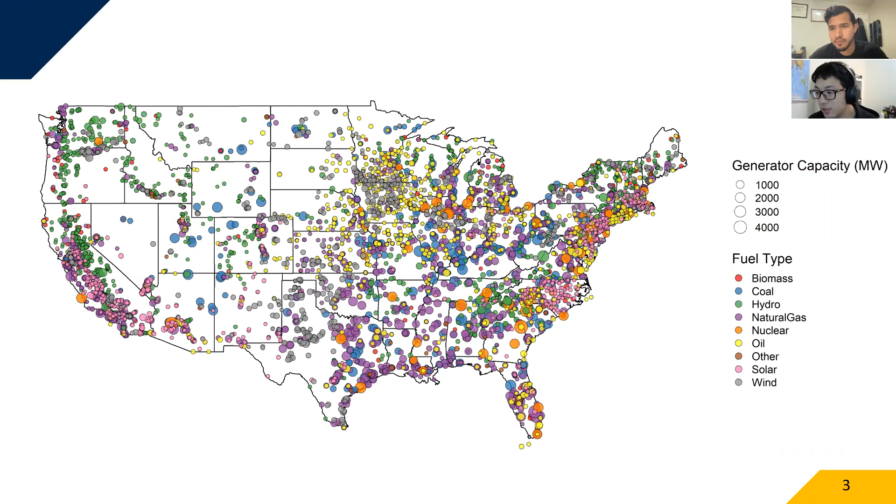Specifically for electricity generation, last time we had looked at this figure already. This is just a quick refresher, and today we'll be focusing on some of the hydro resources, nuclear resources, solar and wind. You can see that the distribution of these resources is going to be quite different from some of the fossil fuel sources we were looking at last time.

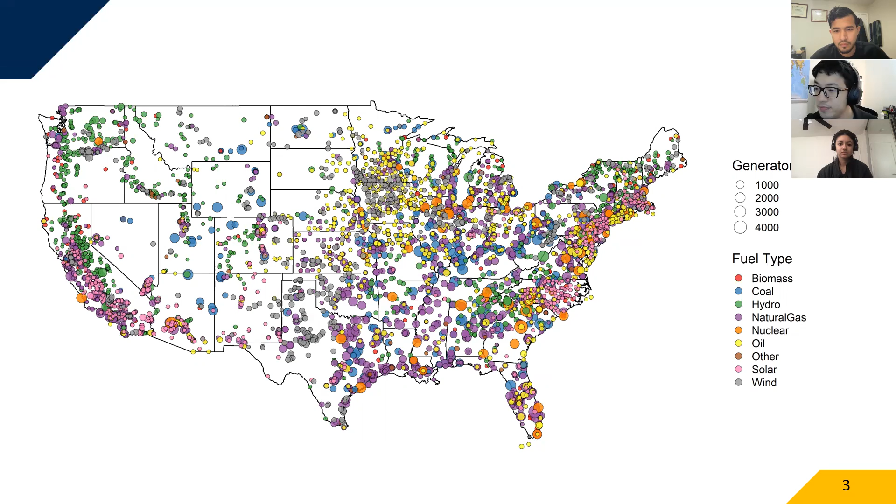This has important implications moving forward from the modern era, particularly because a lot of these plants typically have around a 40-year lifetime, which means that around now is actually when you're seeing a lot of decisions being made about whether or not to keep these nuclear power plants going. Essentially, you have to decide whether you will upgrade and retrofit a lot of the nuclear plants to extend their lifetime and keep them operating. That can be an expensive proposition and is dependent on a whole lot of factors that we'll talk about.

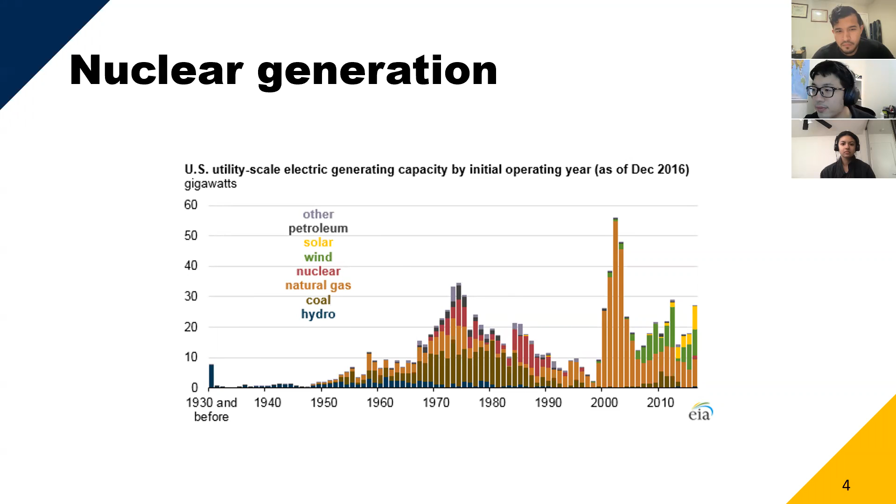Unlike combustion, nuclear reactors get their energy through a different process known as nuclear fission. This changes the atomic structure where you essentially bombard this isotope of uranium, uranium-235, with neutrons. Essentially what this does is it splits the uranium into barium and krypton, and it releases a tremendous amount of energy as well as 3 extra neutrons.

The whole idea here is that these neutrons are needed in the initial reaction, and so this causes a chain reaction where it'll continue to split more and more uranium isotope and release this energy.

It's tremendously energy dense, which means you can produce a whole lot of energy from even a small amount of your initial resource. 1 kilogram of uranium can produce 24 gigawatt hours of energy, so that's several million times more energy dense than coal. If you'll remember back to the first lecture, 1 kilogram of coal releases about 30 megajoules of energy. So this is on a completely different scale.

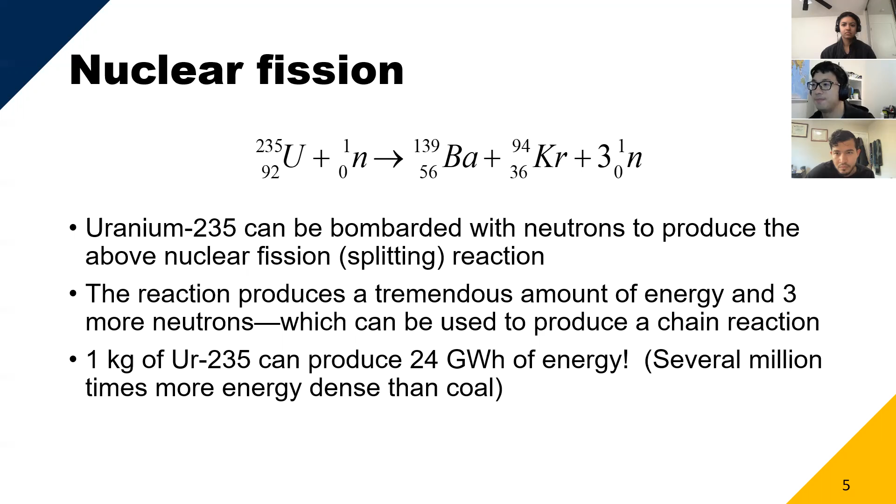In terms of resource availability, total resource availability on Earth is somewhere on the order of several megatons, so 3.5 to 6 megatons. As I mentioned before, these reserve and resource numbers are subject to change if more of the resources are found or better extraction techniques become available. It takes about 27 tons of raw uranium fuel for a 1 gigawatt reactor to use over the course of a year.

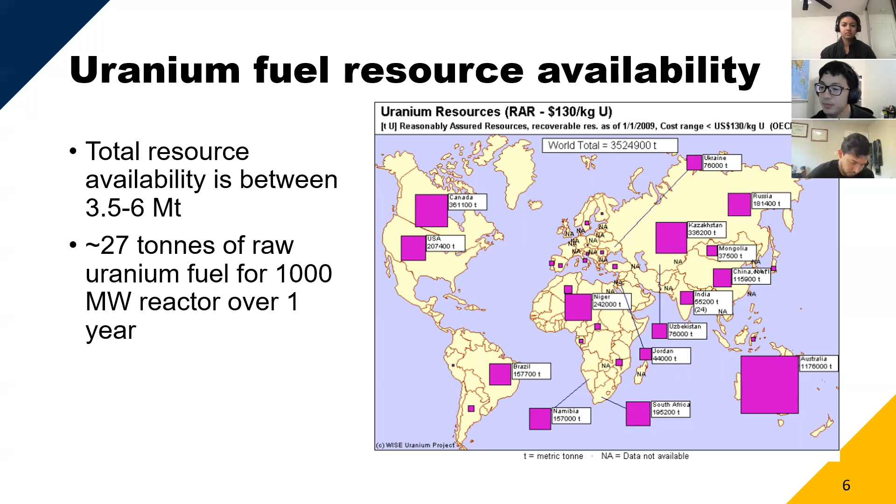Okay, so the way a nuclear plant works is actually very similar to a coal plant. It uses a steam turbine. If we look specifically at everything to the right-hand side, you have a reservoir of water getting heated up, producing steam, going through the turbine, passing through a condenser and going back into the reservoir. This whole portion is exactly the same as a coal plant.

The only difference is that the thing heating up the initial reservoir of water is not through combustion. It is capturing heat coming from the nuclear reactions here. And again, you'll notice that there is a closed loop for this reactor of water.

In this case, this particular closed loop is probably a little bit more obvious why you want something like this. The water in this reactor is actually going to be very radioactive, and so you wouldn't want to have that going through your turbine or exposed to other equipment.

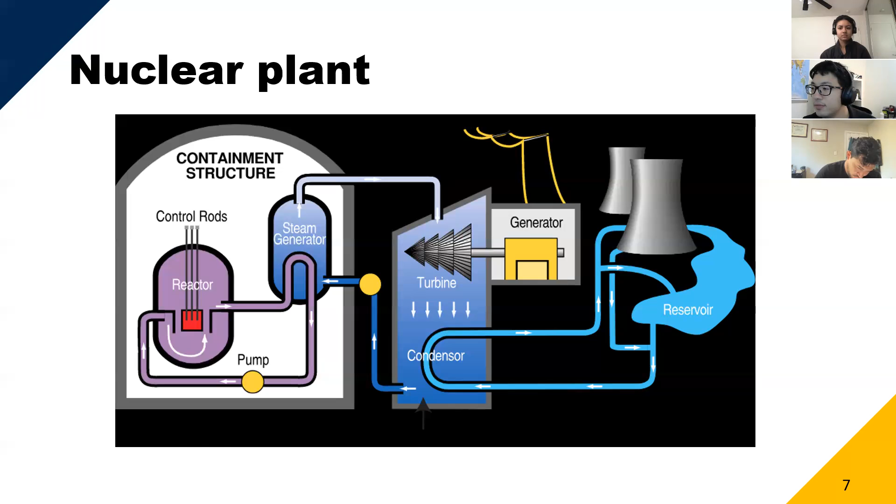Okay, so I was talking about retirement of nuclear power plants, after they reach their sort of 40 to 50 year time limit. And so this is a graph here where we can see license expiration dates for currently operating US nuclear reactors.

Some of them are operating right now without license renewals, but have submitted applications for renewals. And so those are all of these guys in the dark brown, which will, once those licenses are applied, then turn green. And so they'll be able to operate.

And so a lot of existing reactors have already been granted license renewals, which is why you see so much green. That often means that they have to undergo some of these retrofits and upgrades that I was talking about, and that may extend the life anywhere from 10 to 20 years.

So in another 10 to 20 years, we can see a lot of the nuclear plants will start to have their license expire again. I actually don't know if you're able to keep doing that, but it'll be an interesting time as more and more nuclear power will either be forced to retrofit and upgrade again if they're allowed to, or to retire.

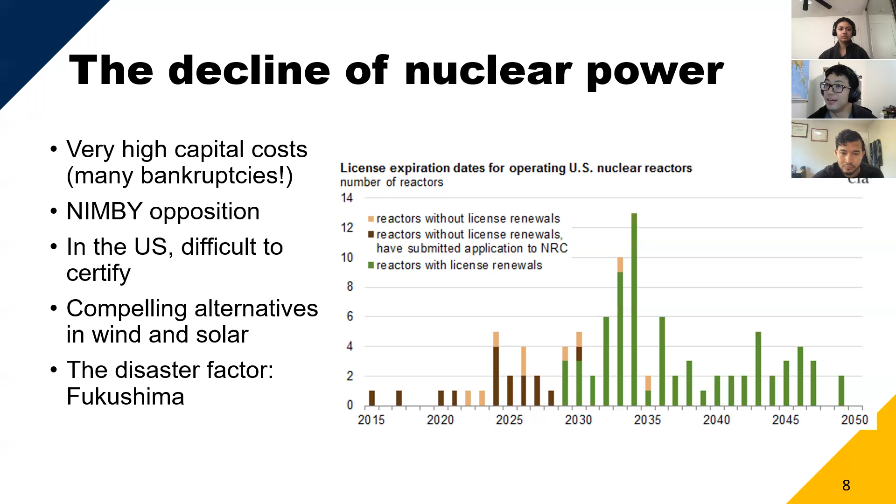Yeah, any other questions?

Okay, so we will move on to talking about renewable energy. So the definition of renewable energy: this is energy that's derived directly or indirectly from either the energy of the sun or of the earth.

And obviously it has to be renewable, unlike every other fuel we've talked about before, which is a resource that will eventually get used up. All fossil fuels and even nuclear, you are using up some of that product to generate the energy. In this case, you're doing the same thing, but that energy is continuous and will come back. Technically, the sun is going to explode in a couple billion years, but we essentially consider it an infinite source of energy.

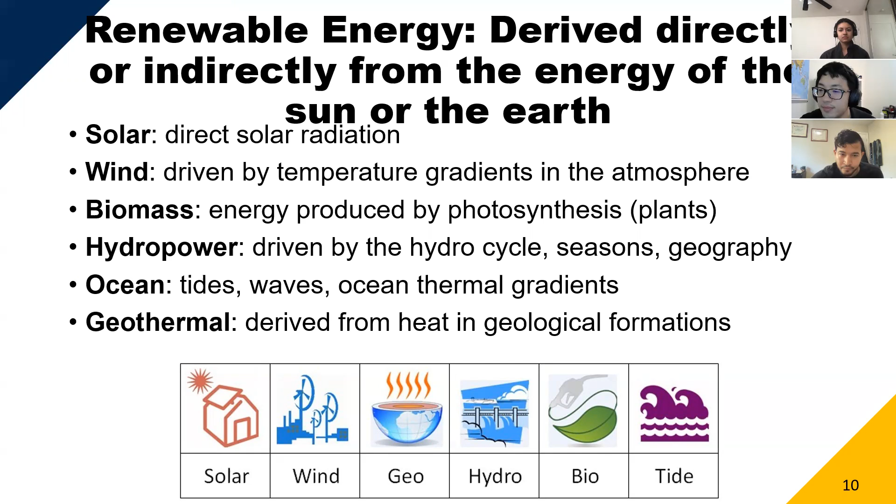So why are renewables important? Why have we been pursuing this? It's a key component of sustainability and securing our energy future. We're not going to be using up that resource like we will with other types of fuels.

Renewables are also an important strategy for energy security. For a particular country, let's say the United States, the government doesn't want to rely on other countries for their resources - having to import oil from Canada and Mexico, or before we had shale, importing natural gas from Europe. So a lot of these issues in terms of geopolitics are reduced a lot when you can simply produce the energy yourself.

As we saw in new capacity installations, renewable energy is expanding very rapidly. Into 2019, it accounted for over 70% of new worldwide capacity. That's predominantly wind, but there's some solar in there, and we'll see more specific numbers in a bit.

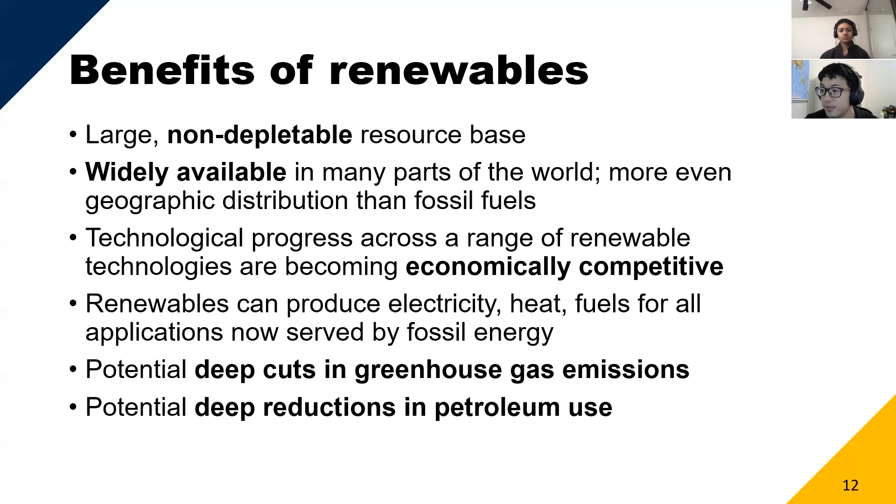Generally, renewables have higher costs, although those costs have come down over time. We think of wind and solar as being totally clean, but they're not actually always 100% carbon neutral - we'll talk about some examples of non-carbon-neutral renewables. And depending on the type of renewable resource, the land use, water use, and materials use can be fairly significant.

Integrating renewables into existing energy systems can be challenging. So what does that mean? The sun doesn't always shine, the wind doesn't always blow, and so in order to adequately meet electricity load, there has to be some other mechanism to get electricity to you when the sun isn't shining or the wind isn't blowing.

Question: does higher cost mean establishment cost or cost of running the plant? For solar and wind, it generally means the capital cost. The cost of production of a new unit of energy once you have a solar or wind plant installed is zero, because you don't have to pay for your sun resource or wind resource like you would for a kilogram of uranium or some amount of coal or natural gas. So on the marginal side, it's going to be way cheaper actually.

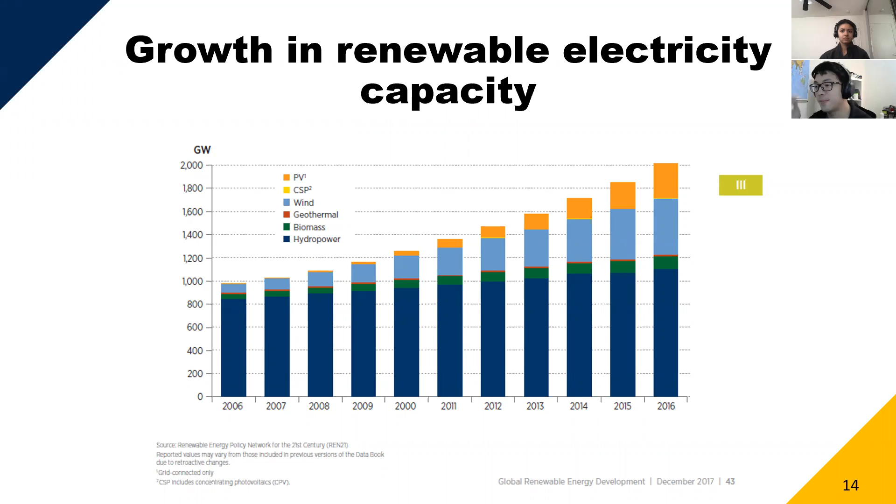Okay, top renewables by technology. This is a breakdown. We can see for hydro, it's going to be pretty dependent on what resources are available, as I'd mentioned before.

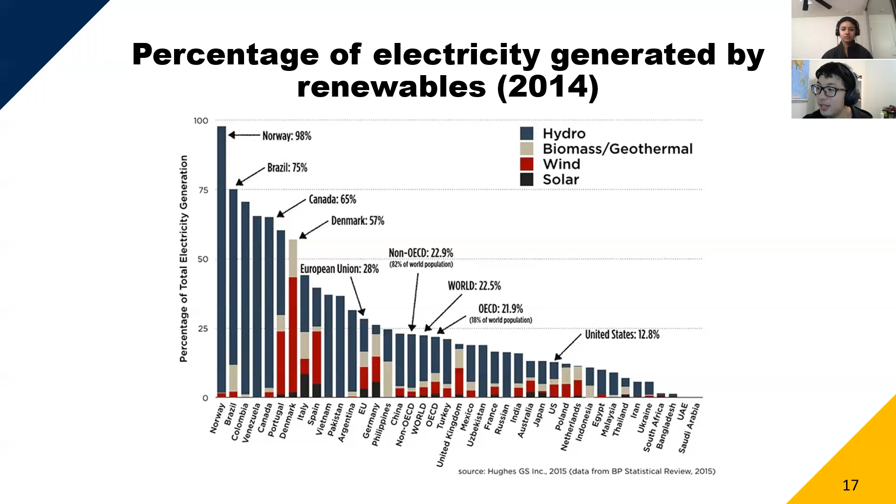Okay, so any questions about our high level overview of renewable statistics?

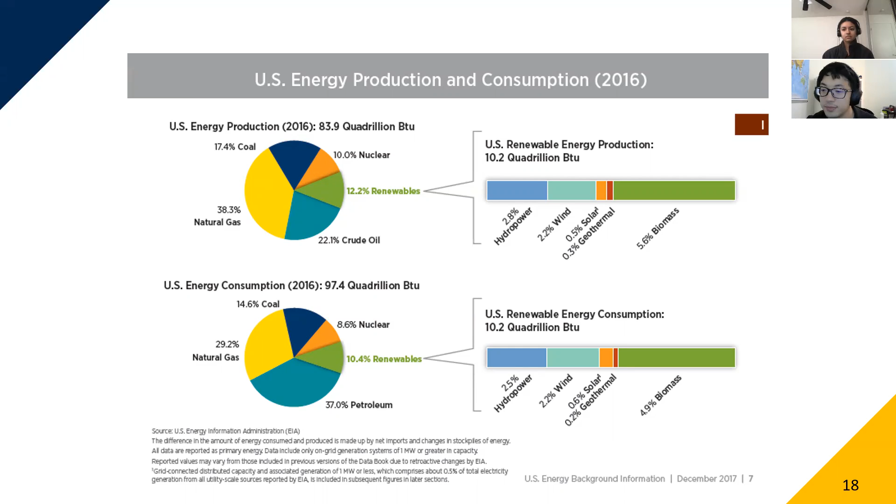Okay, so we'll dive in and talk specifically about each of the technologies, starting with hydropower.

So hydropower has been around for quite a long time, and this is one of the most steady forms of renewable generation.

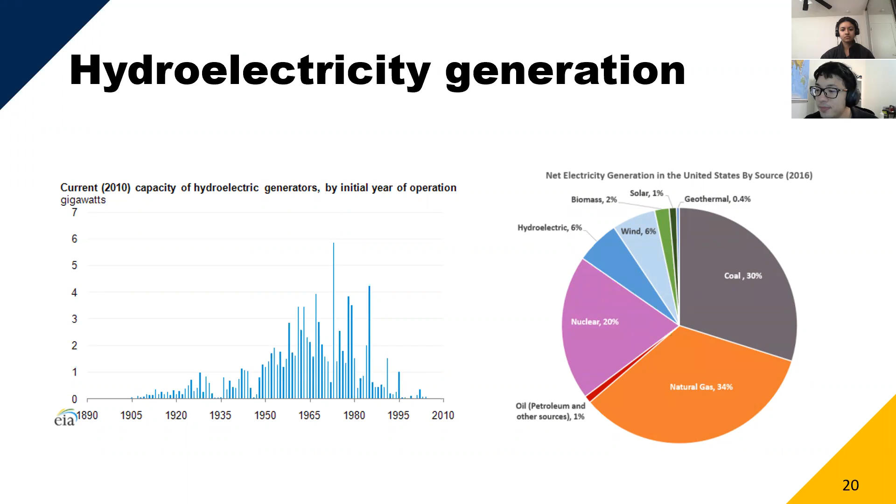I have a quick question, Alan. Yeah, sure. This general statistical conglomeration of hydro resources does not include tidal, correct? Like tidal power is its own thing. Yes, okay, yes, tidal power is its own thing.

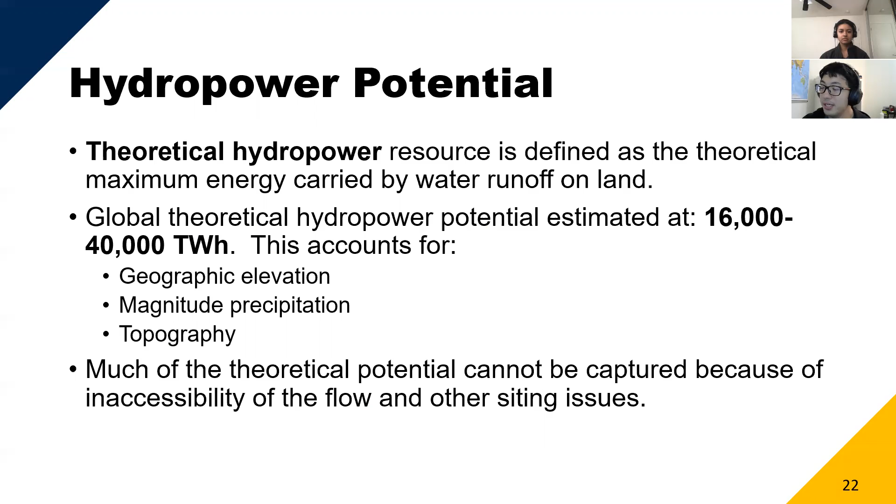And this isn't only about the availability of water per se as something you have to pass through the turbine — we'll show how that works in just a second — but also the amount of energy you could produce out of the turbine is related to the height of the water in the reservoir, because it uses potential energy. The amount of energy is related to the potential energy of the water in your reservoir.

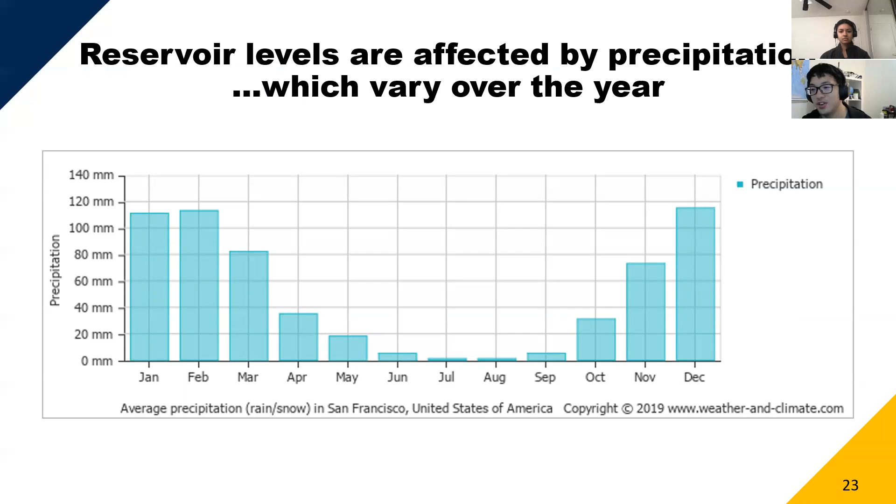Not only do these change over the course of one year, it's also affected across many years. If you've been a resident of California over the last decade, you'll know there have been substantial issues with drought in California, which can affect the availability of hydro resources. Places that have a lot more steady rainfall, like the Pacific Northwest, will have substantially higher certainty in terms of resource availability.

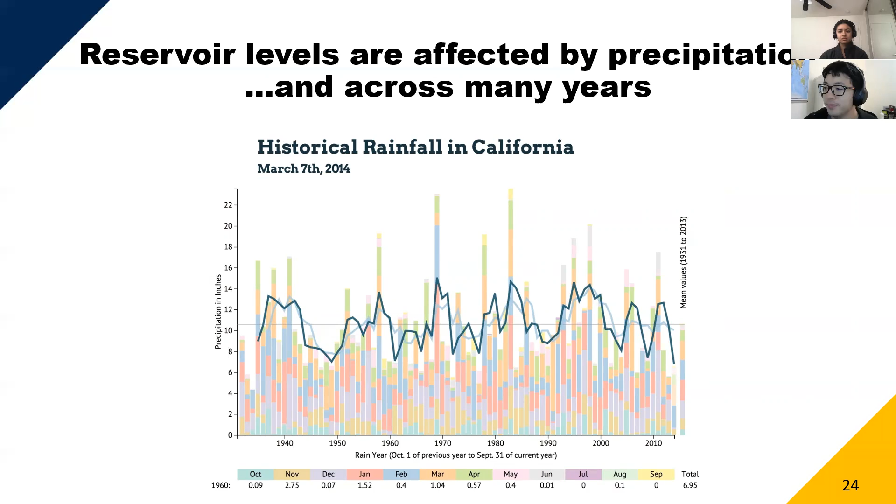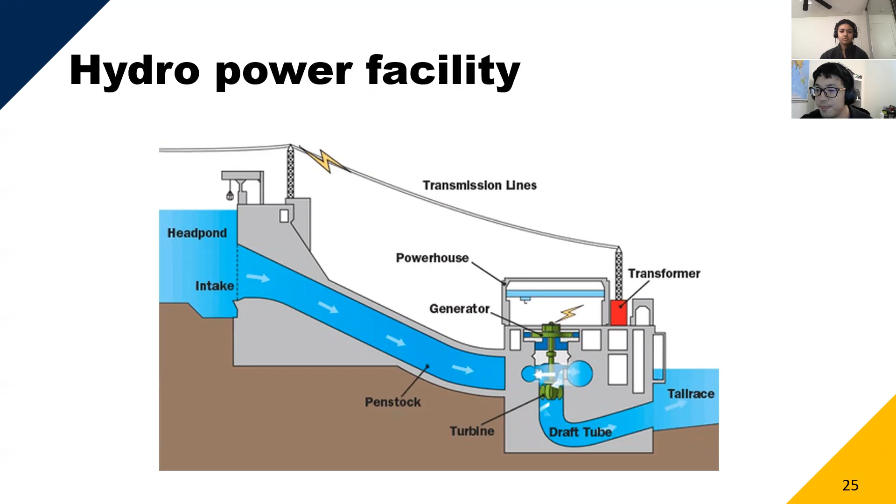So if I go back one slide, that refers to the potential energy difference at your intake versus coming out of this turbine. Excuse me, Alan—can you go back to the equation? Sure. Because that equation, I guess, is coming from the first law of Newton, right? No, the acceleration thing, right? Because you can measure that just when you have a height. Yeah, so where do you use that? Because you have there the density and as the acceleration, I guess it's because you're considering...

So this equation comes from the equation for potential energy, which is equal to mgh: mass, gravitational constant, and height. For any object, say I took a bowling ball—the classic physics example—and put it on top of a building that was 100 feet high, the amount of potential energy that bowling ball has compared to one sitting on the ground, all the energy you could possibly extract, would be related to the height: 100 feet times its mass times its gravitational constant. This is exactly this equation. We're calculating the mass of water based on density versus volume, which gives you your kilograms. That bowling ball at the top of the building versus the bottom, you can't actually capture all of that energy, so the amount you can capture is based on this constant here.

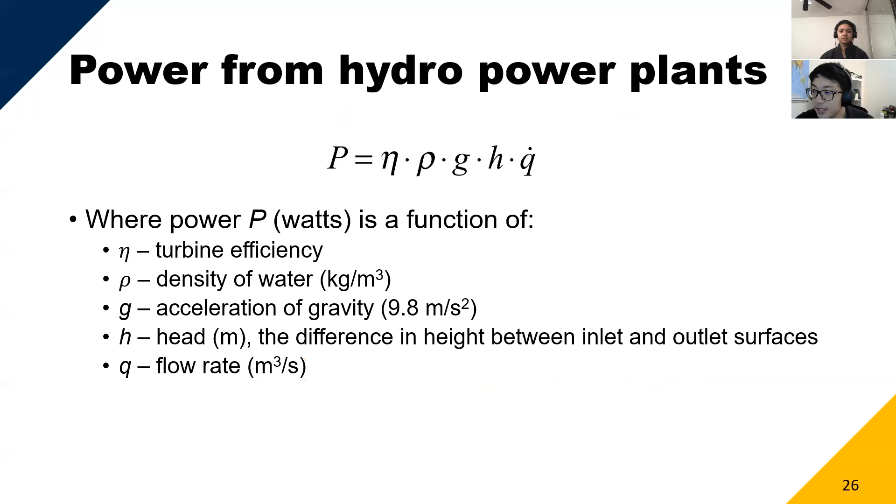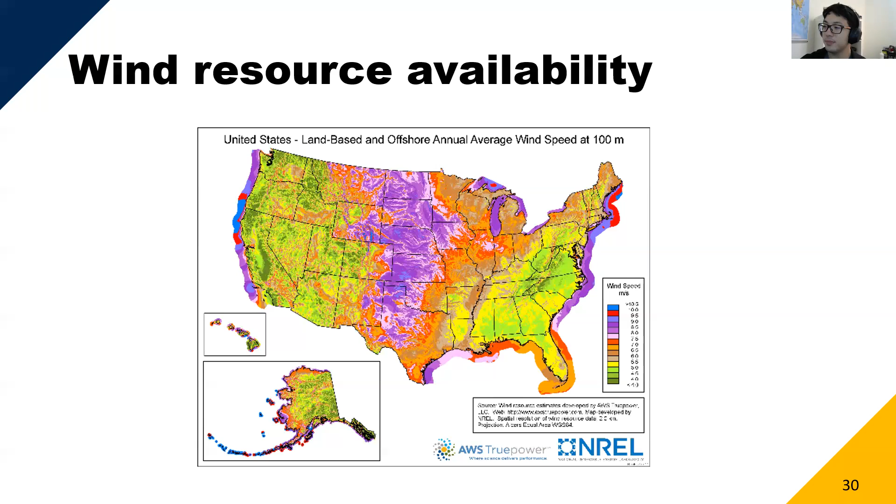Okay, quick back of the envelope: let's say a good wind resource is 500 watts per meter squared, where the meter squared is the rotor area, at 7.5 meters per second, which is something like 17 miles per hour. Converting that for efficiency, we end up getting something like 1,000 kilowatt hours per meter squared per year, which would be a good wind resource.

The size of the rotor to power a conventional house might be something like 24 meters squared, so that's a 5.5 meter rotor diameter. To power a car, a similar type of size. And for a typical wind farm, you'd space turbines out by about 5 by 10 diameters, referring to the spacing between each turbine. We'll see how this plays out in just a second.

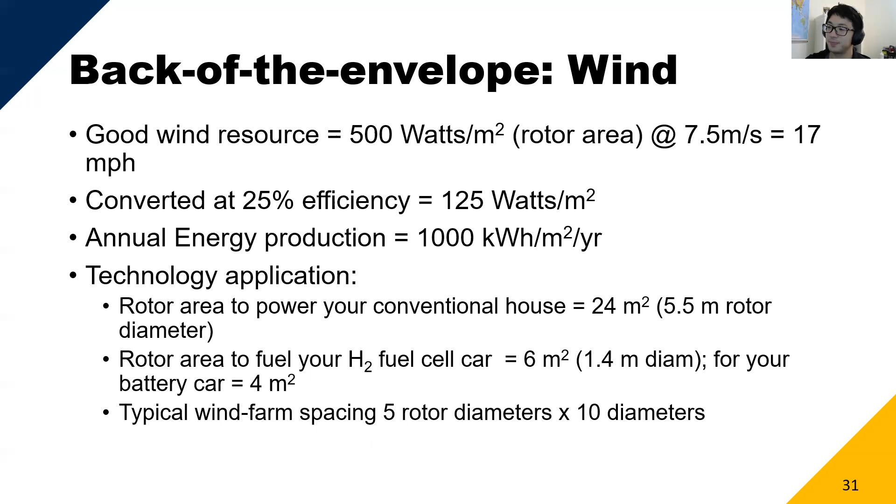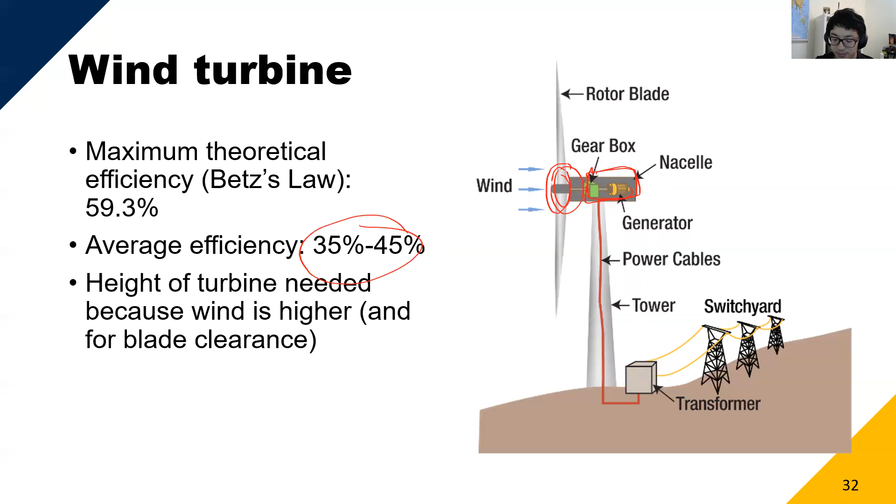Okay, so then we can use that equation just for comparing, let's say, the potential between regions or among regions. Yes, right, yeah, exactly, I would, yeah. Just because we're talking about terminology, potential energy and kinetic energy, I would be wary about using the word potential too loosely, but yeah, that's right. Yeah, I mean, like the potential of some specific regions, because you can capture that energy with those specific parameters there. Yes, yep, that's right.

Okay, and this is an important concept, right? So when I'm a developer and I'm deciding to install my wind turbine at site A versus site B, you better believe that I'm gonna try and get an accurate measure of the wind speed, right? Because wind speed translates directly into energy, which directly translates into the amount of electricity that I can produce and the amount of money that I'm going to be making, right? And so the parameter of wind speed plays directly into the idea of economic calculus that you would do for deciding to install a wind turbine.

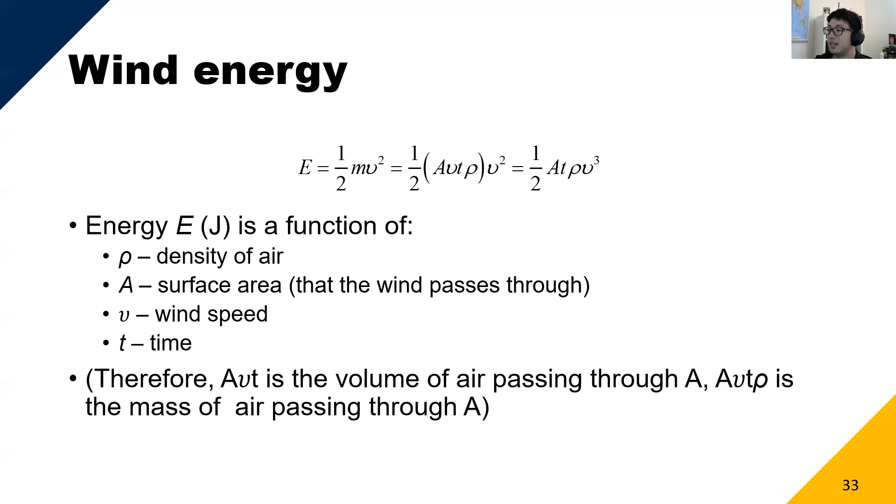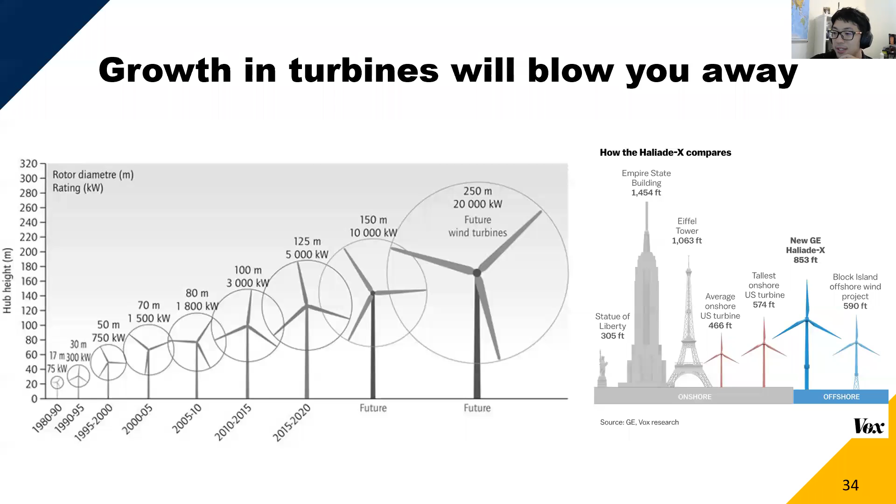As turbines get bigger, their capacity increases, right? That makes sense when we think about that equation, it's based off of the cross-sectional area of your blades and the rotor diameter. So these things are growing in terms of capacity, growing in height, growing in diameter for their rotors. We can see this progressively happening as average installs are progressively growing over time as the technology improves.

Duncan is making a good point. The wind speed is also really important because it increases as a cubic factor rather than linearly. So you get much better returns to operation as the wind speed goes up. And so you really want to be installing your wind turbines in places that have higher wind speeds, which makes installation in offshore facilities much more compelling.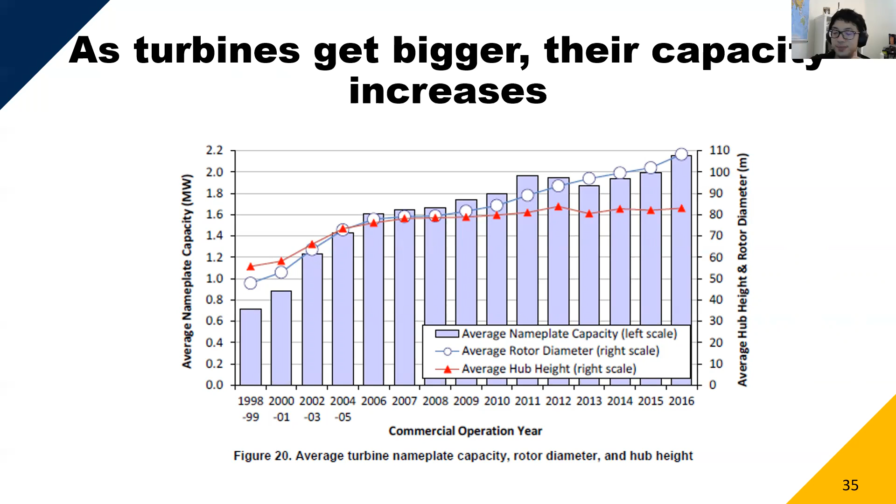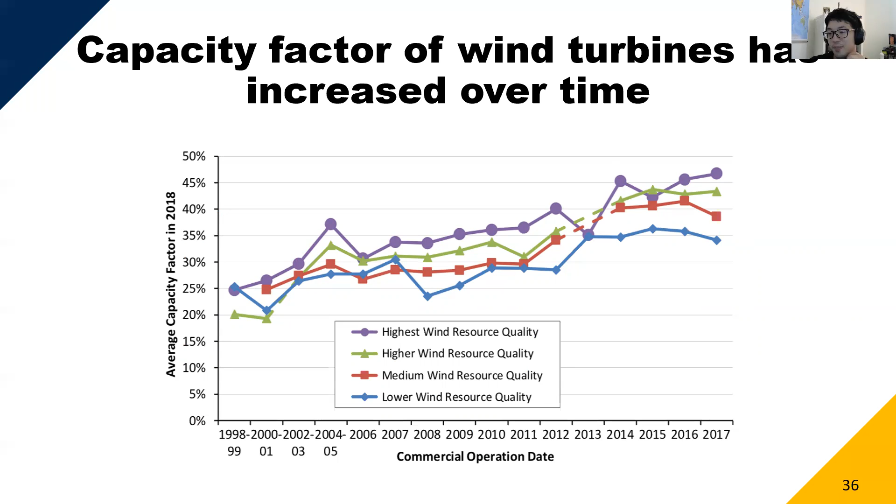One quick note that's an important concept is the difference between capacity and power generation, and this idea of capacity factor. So if I were to install 1 gigawatt of nuclear power versus 1 gigawatt capacity of coal power versus 1 gigawatt capacity of wind power, the peak power generation of each of these generation facilities is the same, but the amount of energy you're going to extract over the course of the year depends on how often that generating facility is operating. We refer to this as a capacity factor.

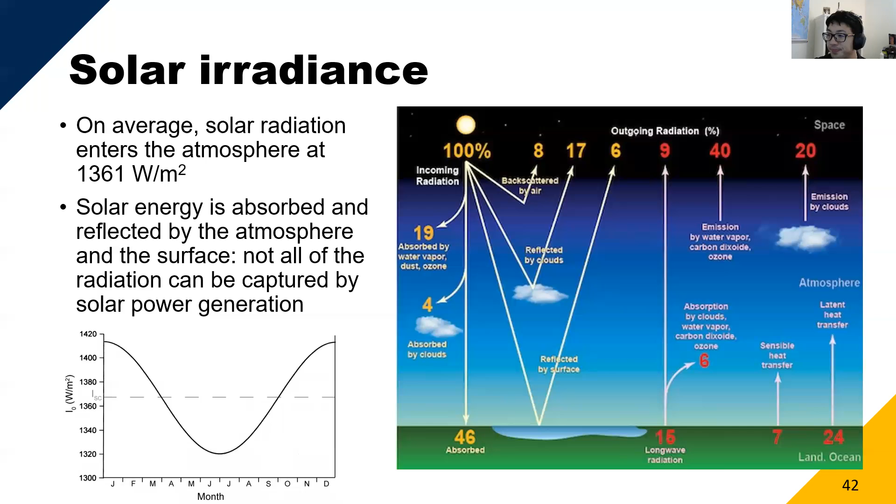It's going to fluctuate over the course of the year, because of the amount of stuff that sunlight passes through in different seasons, since it's coming in at an angle rather than straight down. The amount it passes through is larger in the winter months compared to the summer months. So atmospheric conditions, time of day, time of year, and solar cycles affect the amount of energy at the Earth's surface.

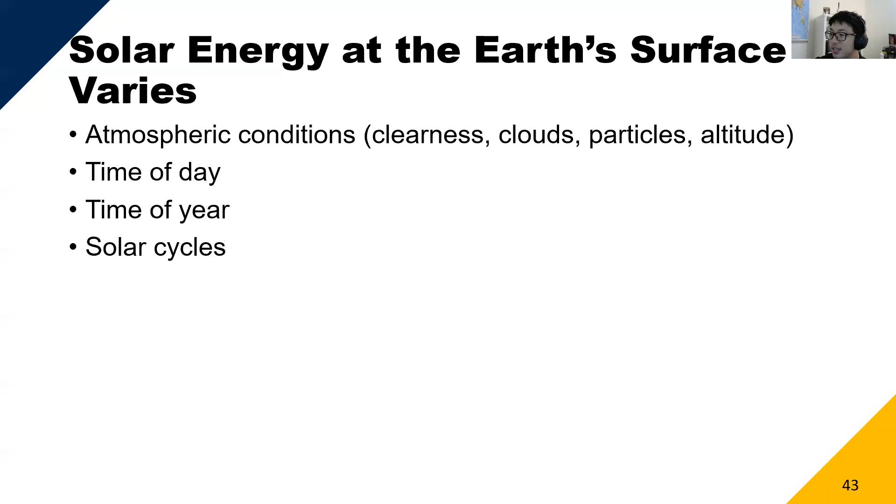So you're getting about a kilowatt per meter squared coming in, and accounting for weather and seasonal variations, the average solar radiation is about 170 watts per meter squared. In 1 hour, you get about the same amount of solar energy hitting the Earth's surface as all energy consumed by all human activities over a single year.

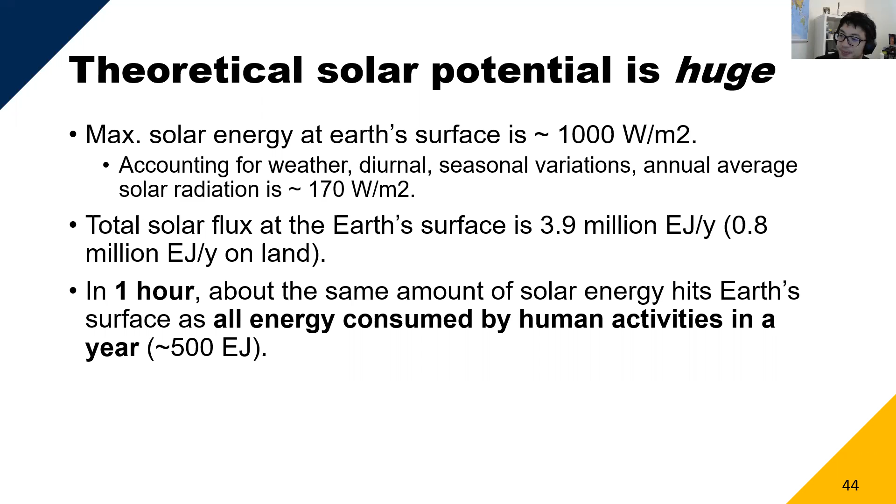If we remember back to one of those earlier figures about resource availability, that big rectangle on solar energy was far and away the largest. So from a strict potential standpoint, if you were to cover the whole globe in solar panels, you could produce more energy than we would ever need in modern day energy use. But of course that's not really feasible, so we want to think strategically about placements and put solar resources where the resource is best.

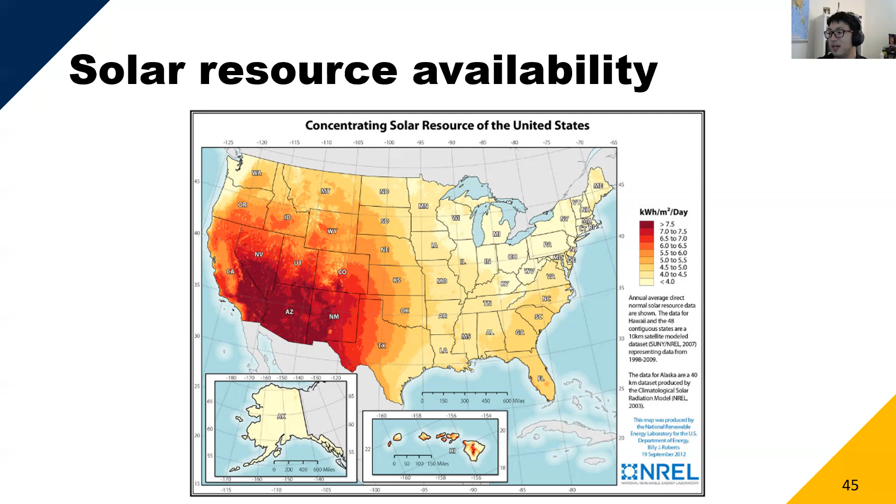So in the US, it looks something like this - this is just a qualitative example. You have the highest irradiance in the southwest area. Generally, as you get closer to the equator, you tend to get better irradiance. If we look at the entire world, it looks something like this, where pink is the highest, then red. Again, the southwest in the US looks best, but most of the solar potential is within certain bands around the equator.

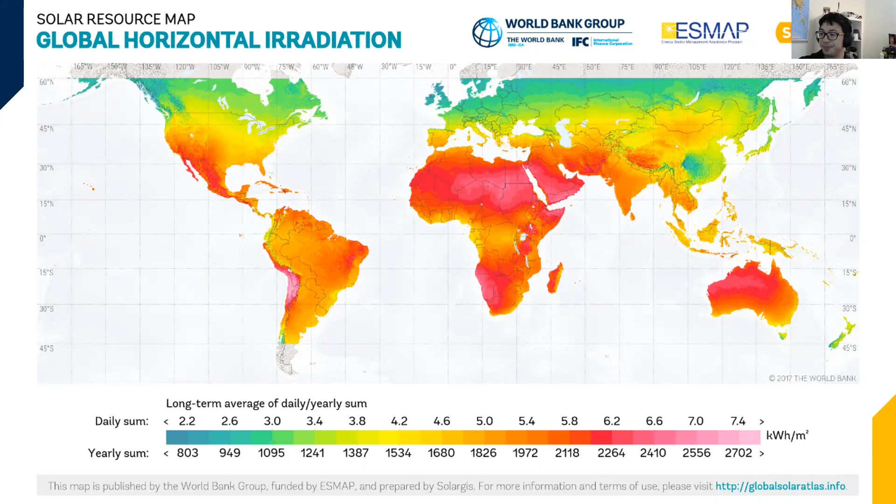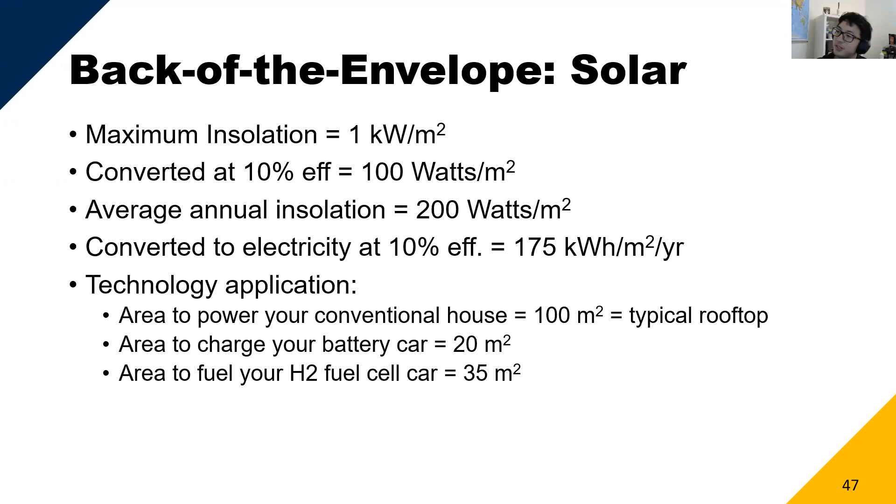These cells are constructed so that you have a semiconductor that allows electricity to flow across the circuit as electrons are dislodged. This is done by doping silicon with boron and silicon with phosphorus to produce your positive and negative charges.

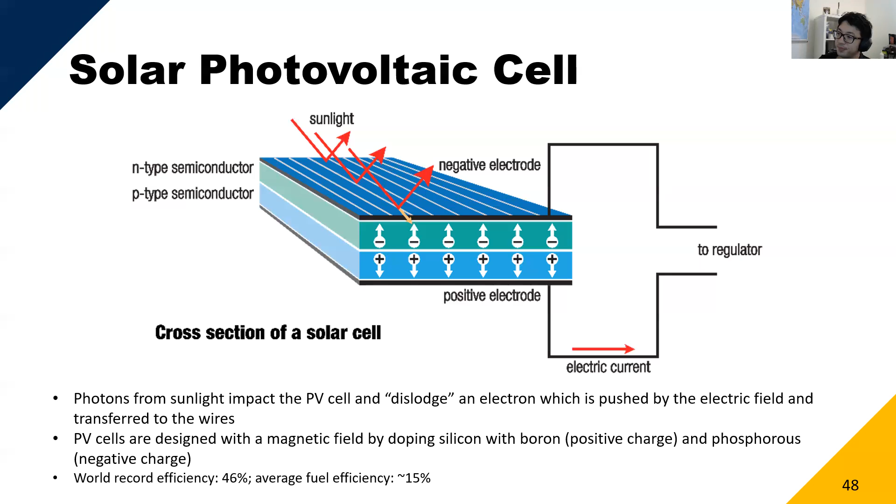The solar radiation energy you can get depends on the type of collector. When we think about a photon impacting your solar panel, the most efficient collection of that energy is if the photon hits perpendicular to the panel. That's why during different seasons you can have different efficiency because of the angle of the sunlight hitting the panel.

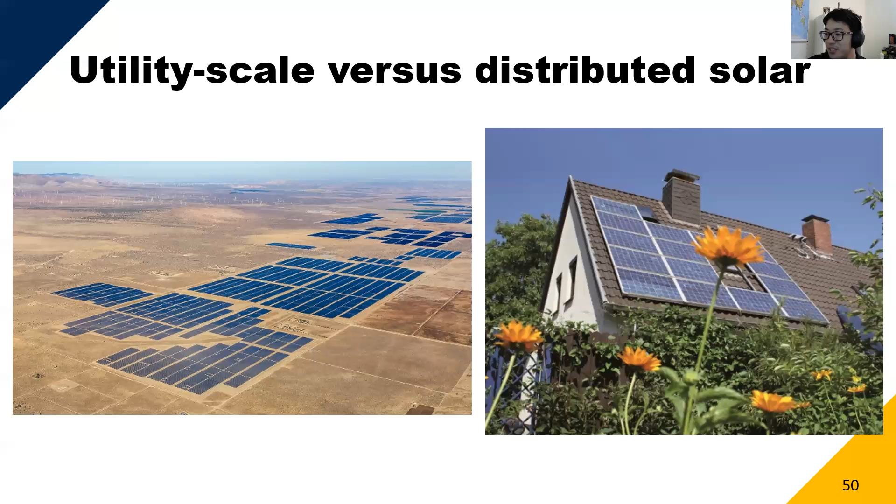But there are certain advantages from having it distributed as well. For example, you can avoid some of the transmission and distribution losses. This is one of the rare cases where the energy production happens right at the site of end use. So for distributed solar, there's this whole scheme of how that works with the electricity in my home, which I traditionally would be purchasing from the utility and getting sent to me.

So many years ago they developed this concept of net metering to deal with this. If I have rooftop solar on my house, I would take that energy, convert it right from the sun, and then you'd have an inverter. The reason we need this is that with a turbine you're always producing alternating current, but with solar energy you're producing direct current. We won't get into details of power flow and how that works - you can ask me in office hours if you're interested - but you need an inverter.

Instead of pulling electricity from the grid, you're using electricity directly produced from your local resource. So what you actually end up having is a bi-directional meter. This meter measures the volume of electricity coming in, but it also measures the volume of electricity getting pushed out back into the grid from your solar panel. When your panel is producing power, it's definitely going to be producing more than you could use in any given moment. The way we net that out is by subtracting the amount you're purchasing from the grid versus the amount you're pushing back into the grid. That's net metering.

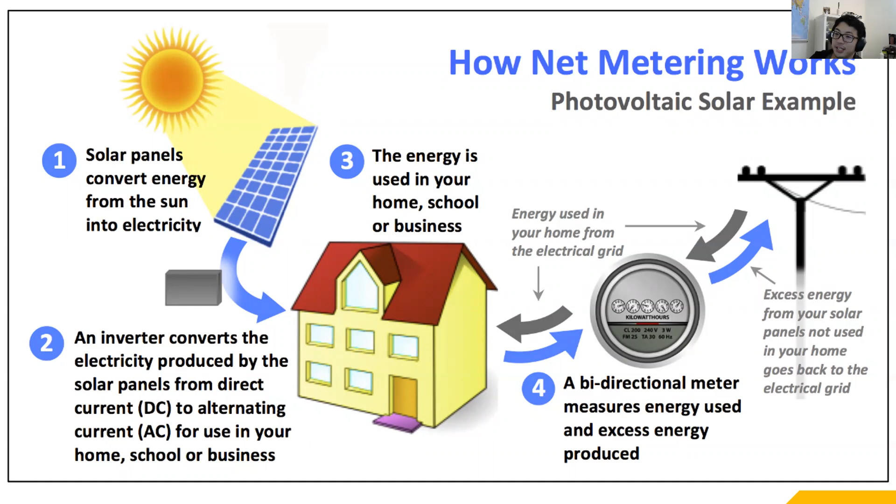You might scoff at this and think this isn't that big of a deal compared to the energy we're getting from electricity. But in a lot of developing countries, a lot of the energy people use is actually related to cooking. Particularly in places like certain African countries where you have wooden cook stoves, this represents a really important technology for time, energy, and monetary savings. There are places where a lot of a person's effort might go into collecting or purchasing fuel just to cook hot meals. So this represents a technology that can provide tremendous savings for certain populations in developing countries.

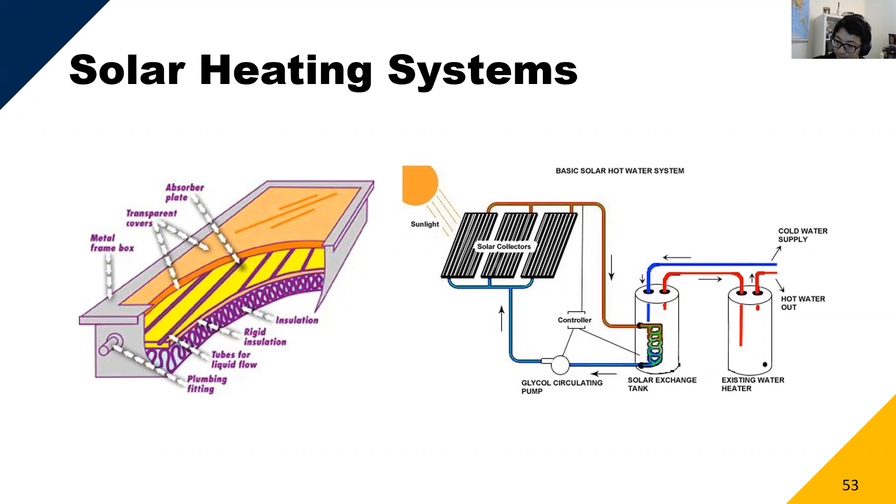Another form of solar energy, which I mentioned earlier, is concentrated solar power. I was saying solar power doesn't use turbines, but that's not quite true - photovoltaic doesn't use turbines, but that's the kind of technology we're used to and have developed over a century now. So someone thought up the idea to employ turbines in solar power as well.

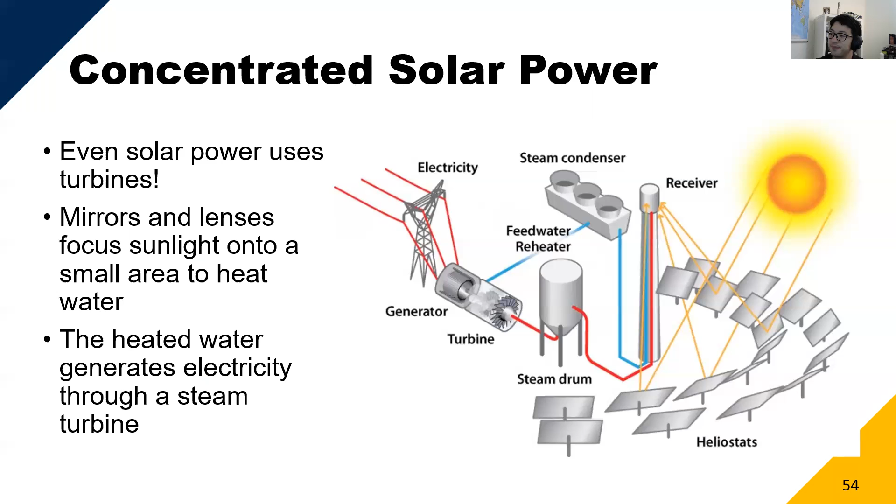This is not a super common technology. It's used a lot in Spain, and there are some instances of CSP in the United States - a few installations in desert facilities in California, for example, but a very small amount, about 5 gigawatts total in terms of CSP technology.

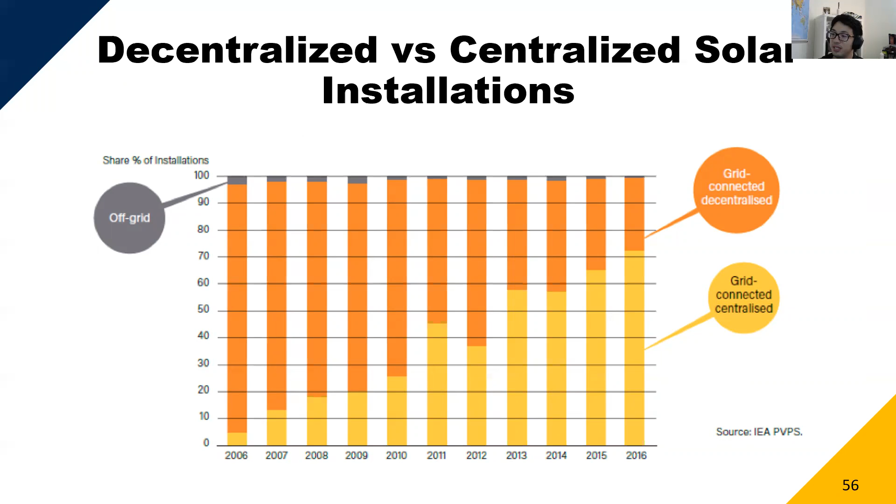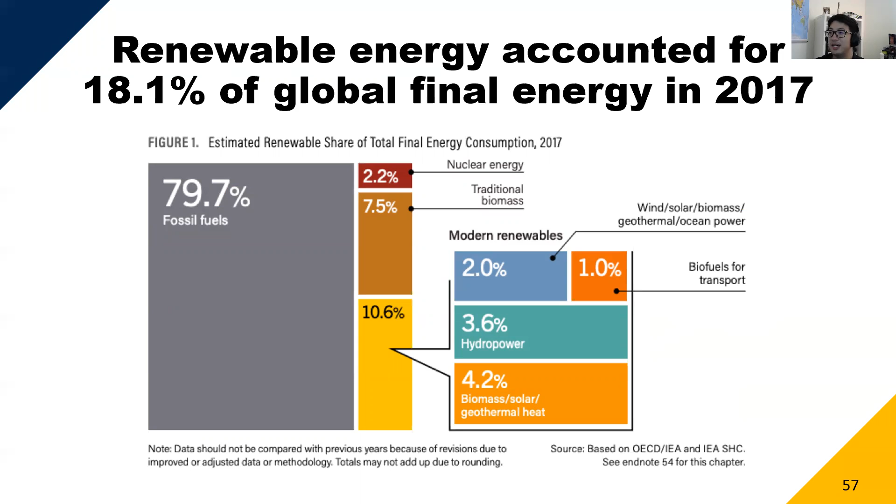Going back to this total accounting of renewable energy, about 18% of global final energy in 2017 - that's all types of energy. For electricity specifically, it's closer to about a quarter of electricity production. Again, breaking it down: hydropower is the bulk, followed by wind, and then followed by solar and biopower.

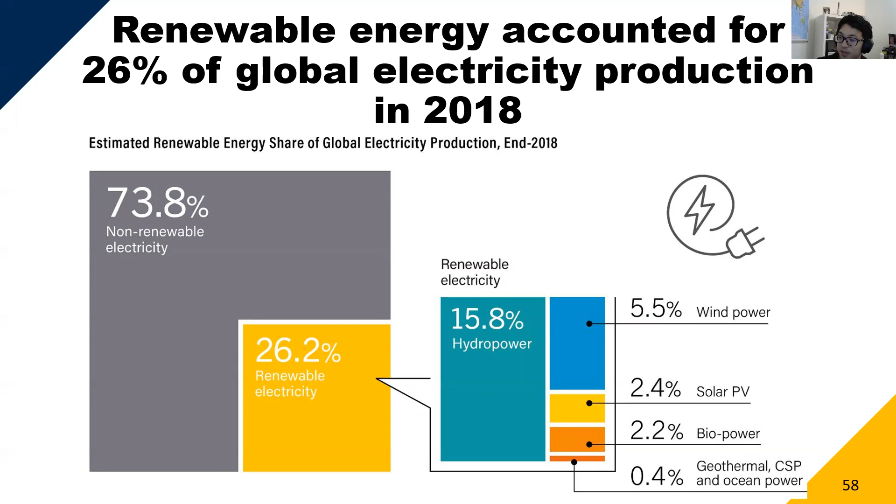I have a couple more slides on environmental impacts of renewables, but I think we'll pick up with that on Thursday so I don't go over time here. We'll finish off the last couple slides on environmental impacts next class.